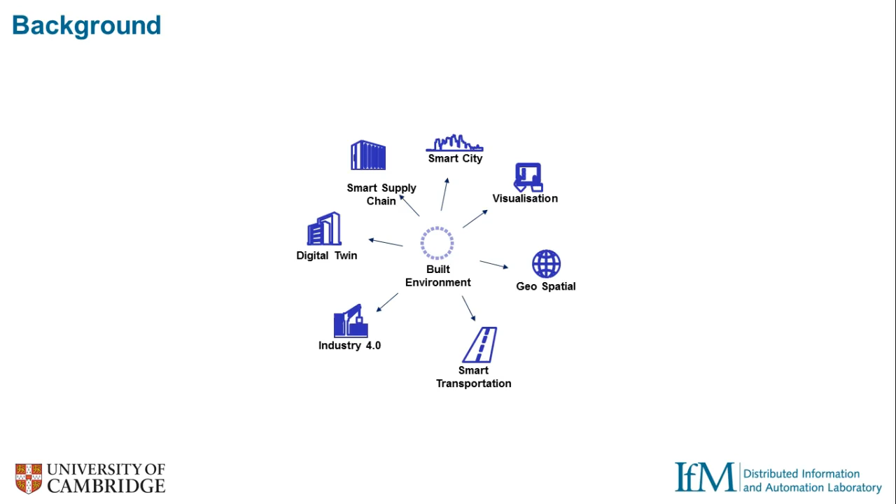So there are a lot of new technologies that came out, such as the digital twin and Industry 4.0, and a lot of other new technologies, such as UAV and GIS. So that means the age of digital is approaching.

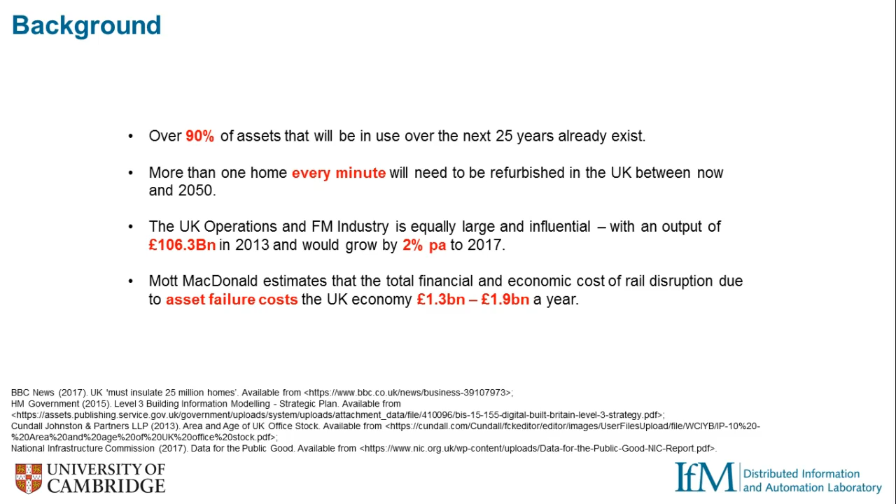Over 90% of assets that will be used over the next 25 years have already existed, and every minute there will be a lot of assets that will be the existing assets. So the optimization of the utilization of existing assets will be our new challenge in the age of digital.

So how to build the connection between the building, neighborhood, city and our humans, where an intelligent, convenient, virtual and sustainable channel will be our new task, no matter the researcher or the industry.

So our project, the CDBB digital twin project, is trying to develop a dynamic digital twin of the IfM building - the Institute for Manufacturing building in the West Cambridge site, and also our West Cambridge campus - and demonstrate impact on its facilities management and wider productivity and well-being.

We cooperate with many different industry partners such as Bentley, Topcon, RedBite, and GeoSLAM.

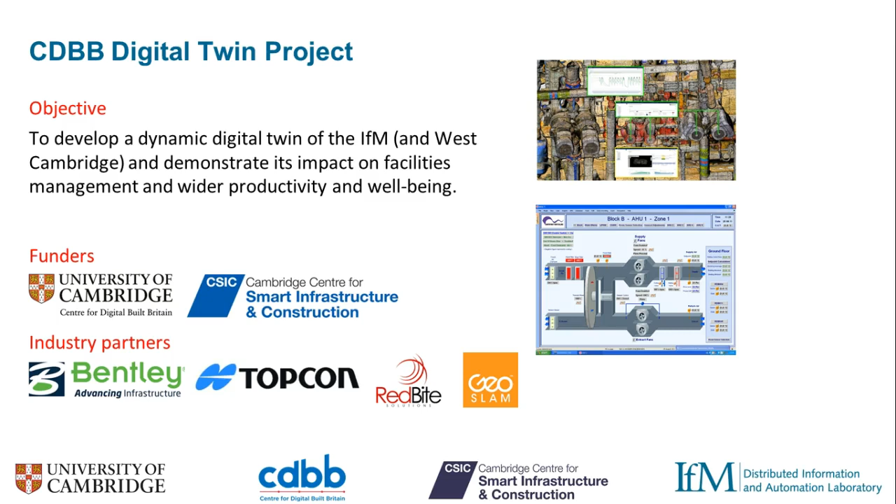So with the government reports about data for public good, digital twin will be a solution for us in the future. So how to design such a kind of digital twin, because a lot of research groups and industry have their own definitions about digital twins, and what is the structure and architecture of a digital twin at building and city levels.

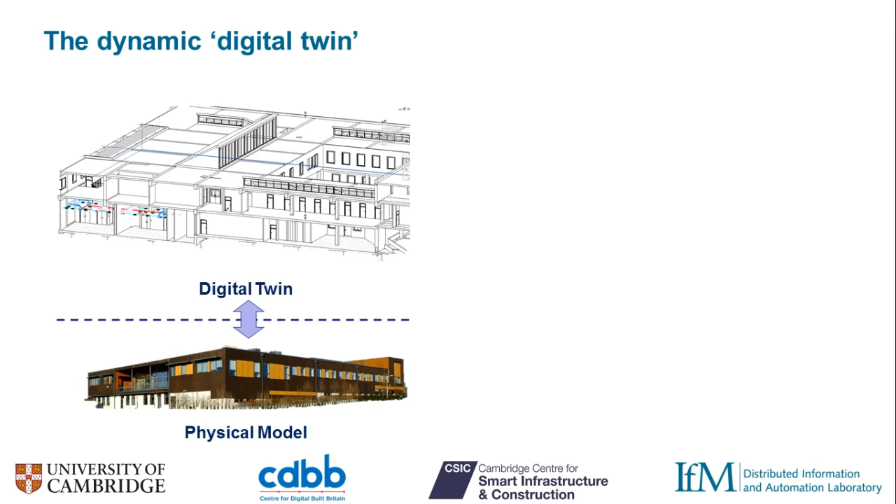So with the guidelines of this framework, we established the demonstrator in West Cambridge campus. So our dynamic digital twin means we integrated a lot of data resources, such as real-time sensor data and

some asset management systems, and also a lot of existing data resources, such as building management systems and some space management systems.

We will support several applications. The first one is the as-is conditions, such as monitoring the performance of specific spaces, and predict the future states, such as predicting electricity use, water use, and providing better decision making.

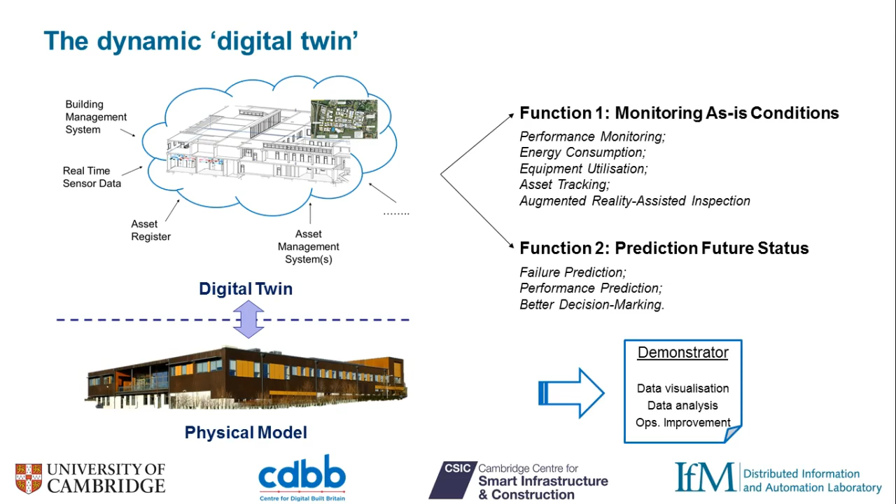So I will present our demonstrator in West Cambridge site later.

So we work with different industry partners, and we also work with the estate management of this university to support data collection and also data resource collection. We mainly have 4 work packages. The first one is the 3-layer digital twin model generation.

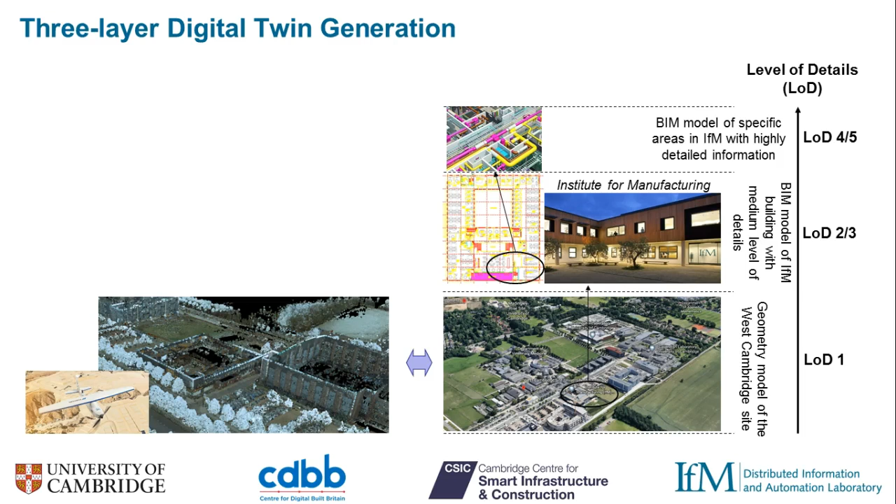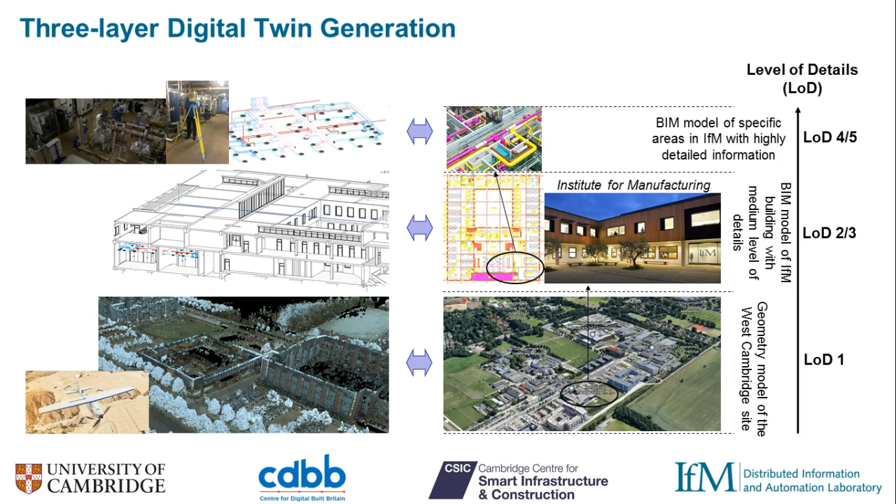We have a 3-layered digital model from the West Cambridge site to the building, and then to some specific places. In the West Cambridge site, we use a UAV to scan the whole site and generate the geometry model. For the second layer, we developed a building information model for the IfM building. The third, we choose some specific spaces, such as plant rooms with complex assets, and also some specific lecture rooms, as a case study.

The second one is we deployed a lot of IoT sensors and made successful transmission to the upper layers. We installed over 50 sensors and around 200 assets tagged in the IfM building, including temperature, humidity, motion detection, and CO2 sensors.

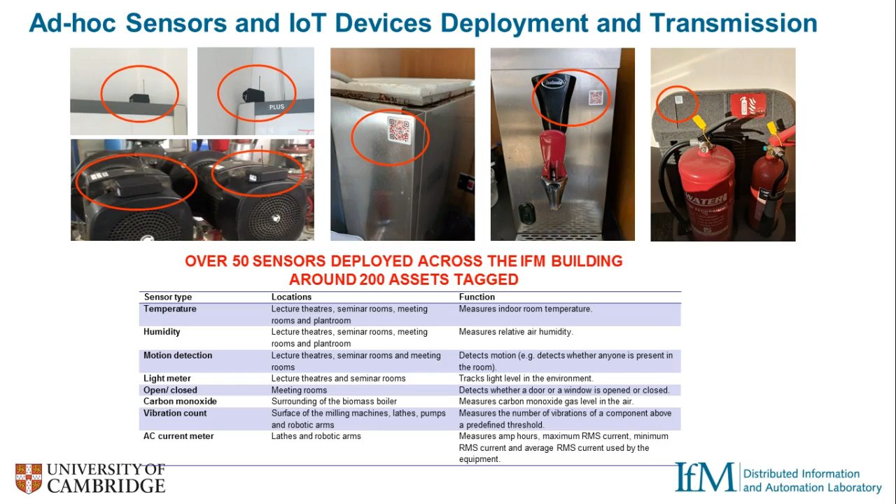And we collect all the real-time sensor data and build a cloud-based platform based on Amazon DynamoDB, and also cooperate with Redbite to develop an app that could collect information from humans themselves. This is the logic for how we transform the information and data to the upper layers, from the sensors and also from the QR code.

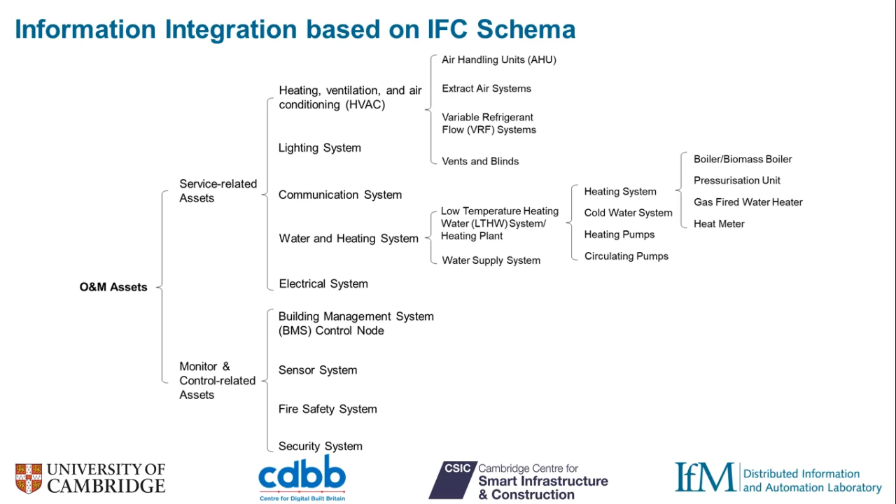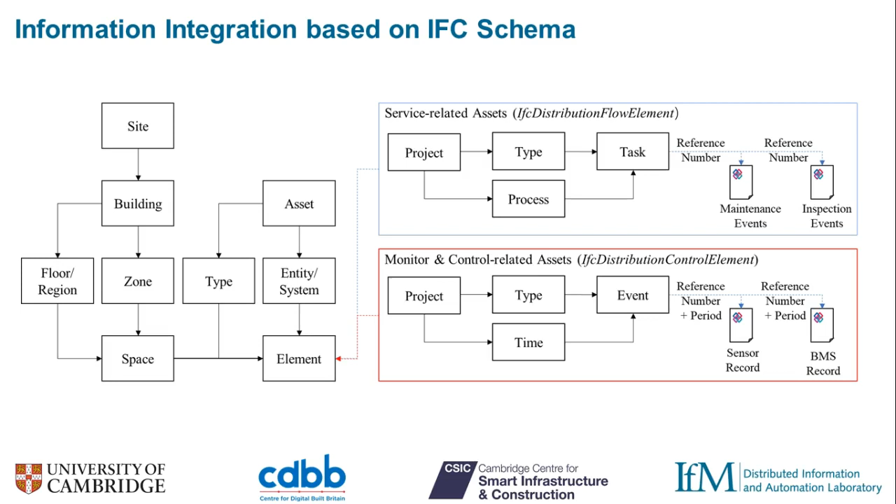So the third work package is we promote a kind of international standard based on IFC, Industry Foundation Classes, and classify all the different assets into two groups: service-related assets and monitoring-control-related assets. Based on the IFC schema, we divided the assets into these two different groups to manage and control all the assets and process different kinds of data.

So I also created a kind of application. This application could support cases if the existing IFC files didn't have that kind of specific asset. This application could support adding new assets to existing IFC files.

So our digital twin visualization integrates building management systems, asset management systems, and space management systems, and also collects real-time information from the QR code and real-time sensor data.

And we actually have two platforms. The first one is developed with Bentley Systems to support potential products in the future about digital twin platforms. Another platform is developed by our research team, which is for research purposes. We will develop more interesting and innovative ideas in the future.

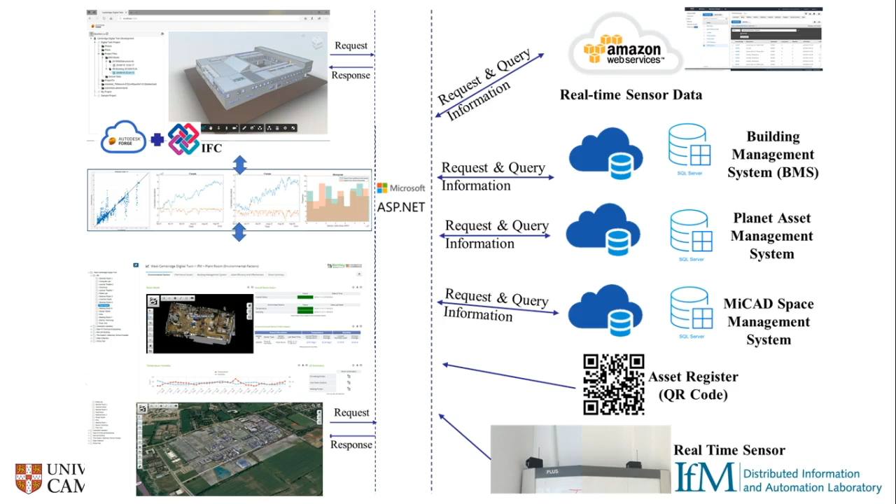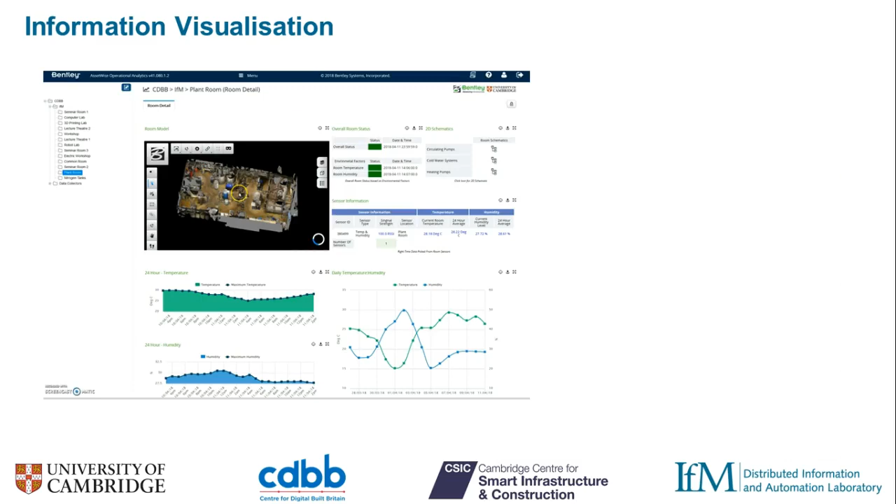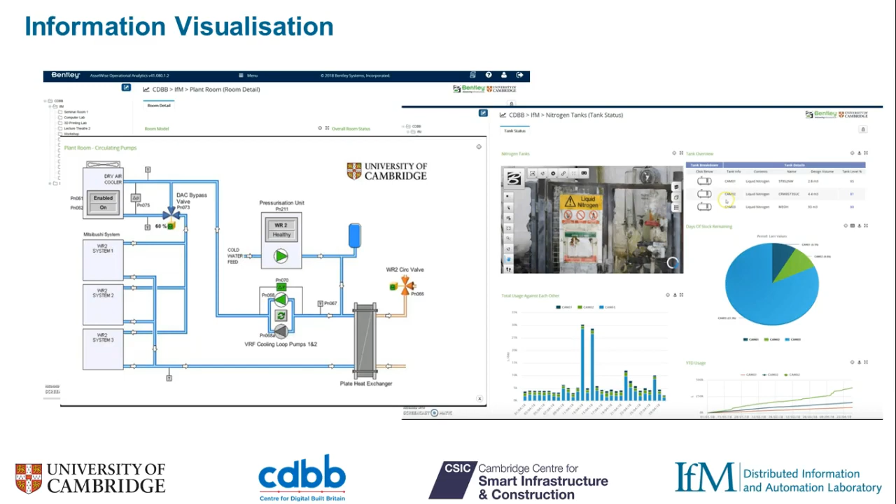So the first one is the platform we cooperate on with Bentley Systems. This is at the building level, and we could monitor the performance of specific places such as a plant room, and also evaluate the performance of some specific assets such as a pump. This is the pump system in our IfM building.

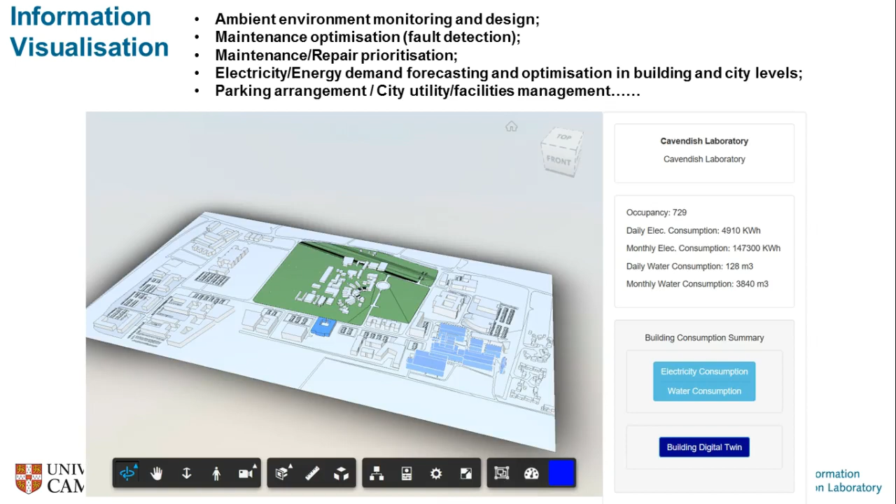Another platform is the research platform developed by our research team. Firstly, at the West Cambridge site, we can monitor the as-is electricity and water consumption, and also predict future electricity and water consumption. Moreover, at the building level, we can monitor the as-is conditions of specific lecture rooms and theaters, and also, based on machine learning and decision trees, find failure assets if some abnormality happens.

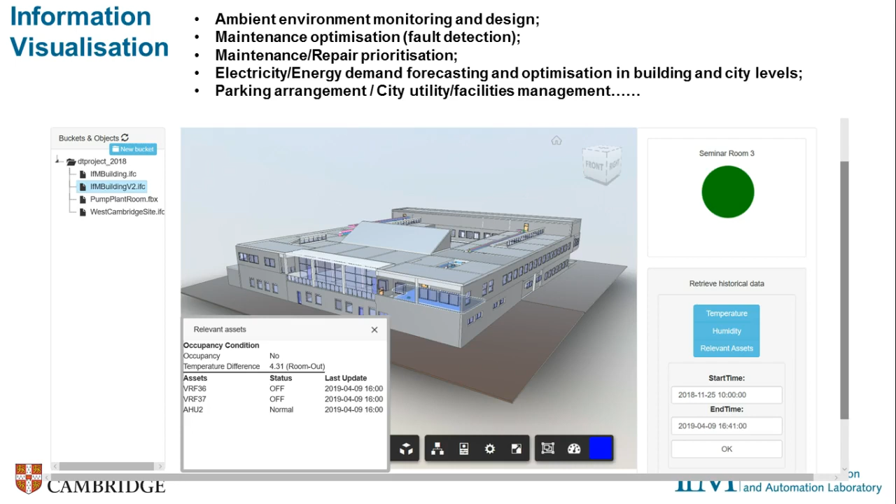So now, not just in the future, we have a lot of interesting applications such as augmented reality, fault detection of the pumps, and also maintenance scheduling tools.

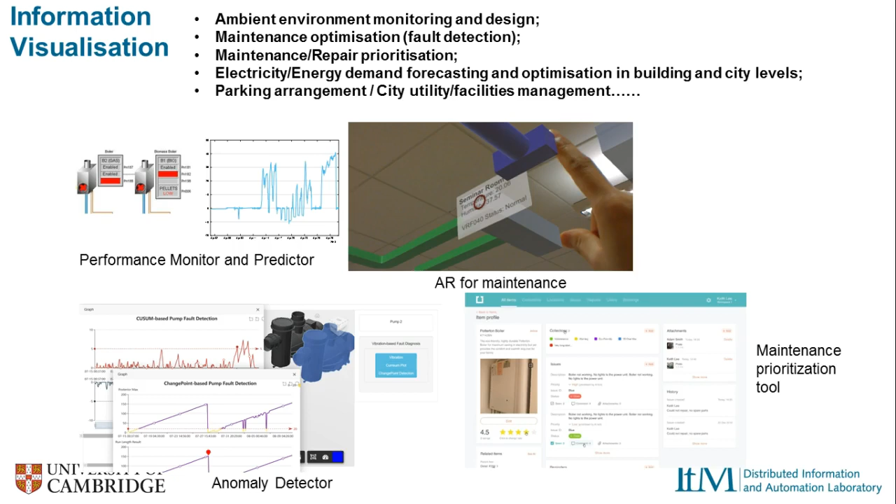So why are we doing this? Actually, we would like to produce a demonstrator for how to build a digital twin at the building and city levels, and we would like to develop more research opportunities or industry opportunities for the digital twin area.

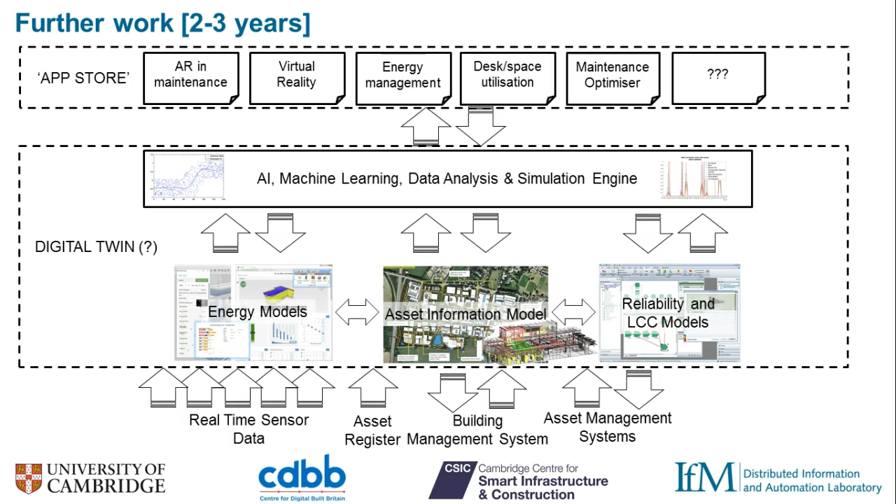So in the next 2 or 3 years, a lot of more interesting research ideas about digital twins will happen in our research group, whether at the city level or national level. Thanks a lot.